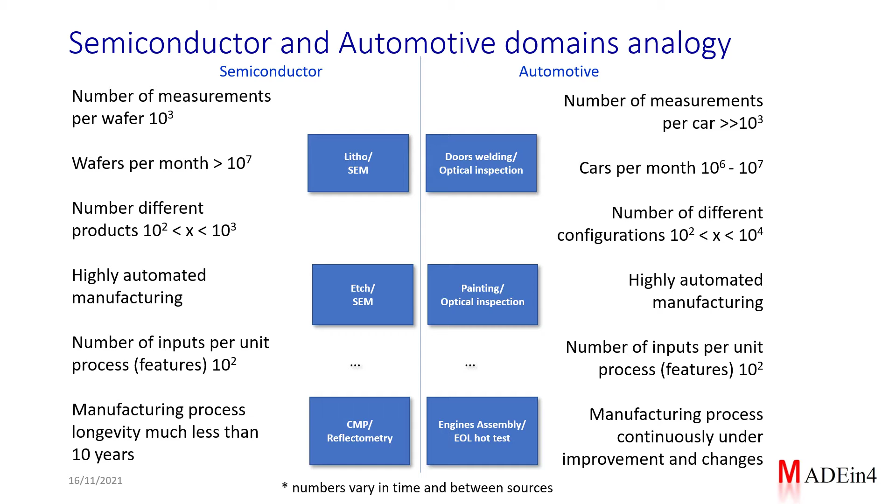The semiconductor manufacturing process typically is quite stable, changing in years typically, whereas the manufacturing process in automotive industry is continuously changing and improving. So these domains share similarities in design and manufacturing flows, although of course the content of these design and manufacturing modules differs. But because of this analogy, we can share innovation in machine learning-based methodologies, and that enables the transformation, as mentioned earlier, from the reactive to the predictive domain.

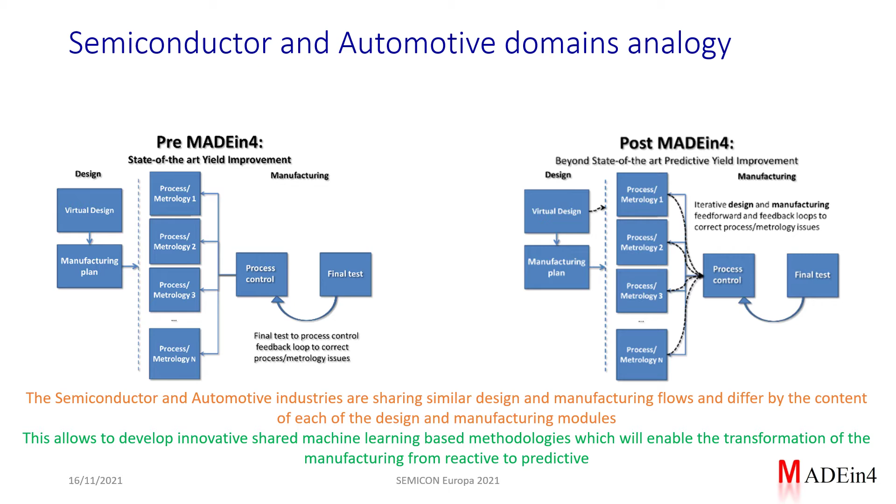Yeah, data is the new oil, is what people say. It's clear that there's more and more data being collected, pushed to the cloud. Sensors are added everywhere. You see that more and more data is also collected and stored for future usage. And there's also increasing use of all sorts of algorithms and machine learning to process all these data.

But data alone is not sufficient. You have to add context in order to make use of this data. So adding data analytics and artificial intelligence helps create information. That is data placed in a context, and that is what you need if you really want to make use of this data. Cyber physical systems play a role in this because the interaction of the physical world, the computing world, and also embedded intelligence is what really creates information and what turns data into meaningful data, being information.

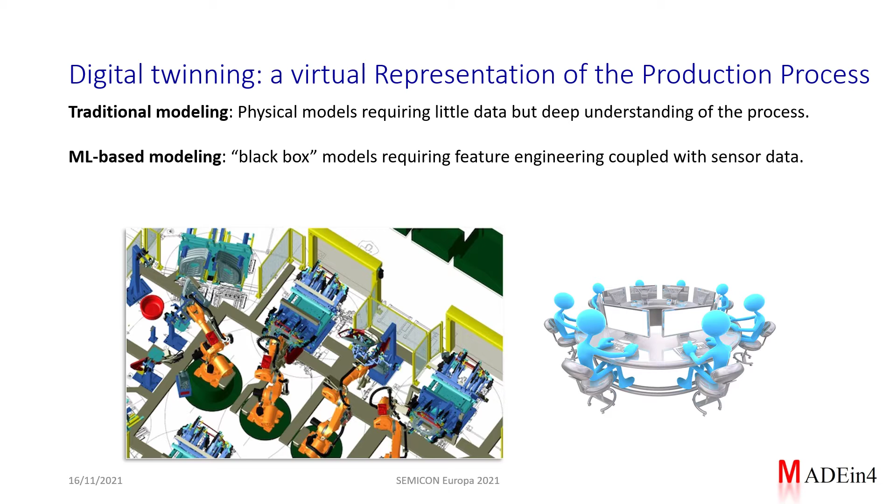This brings me to the project highlights, and the first highlight that I want to present to you is from IMEC. IMEC is an important partner in the project, and one of their tasks is to supply samples to the partners. In this case, they created samples of back-end of line devices, and with those devices, programmed overlay is possible, and partners can use these samples to test their metrology tools and compare the results to other data available.

Another very interesting result is produced by Excillum, and actually Simona from Excillum will be presenting this in more detail later this morning. Last year, Excillum produced a first prototype of a new X-ray source, which has a higher power and in this way enables a higher throughput for X-ray metrology tools.

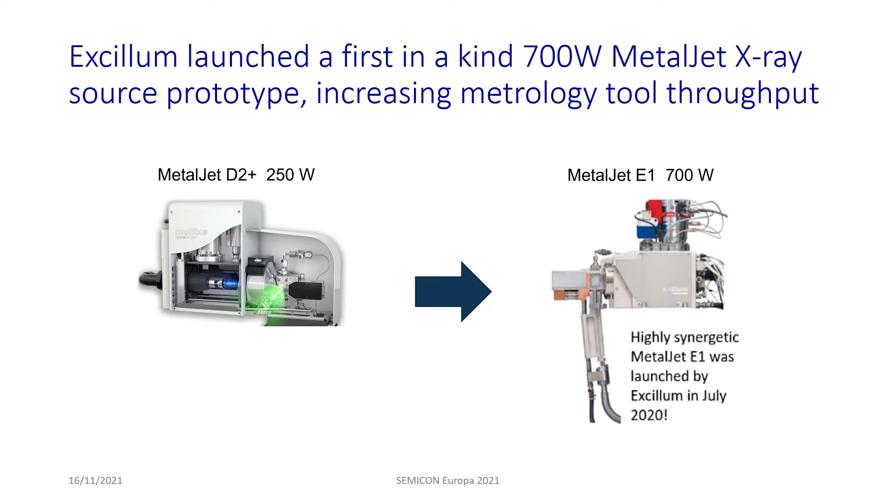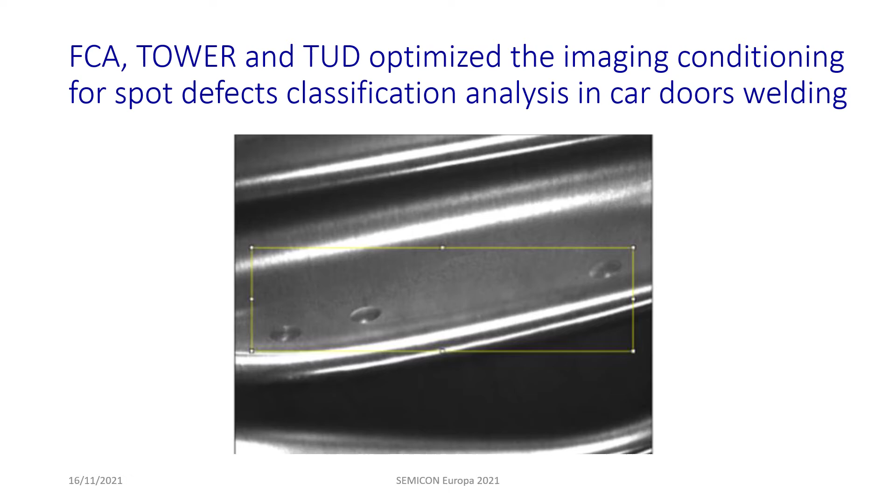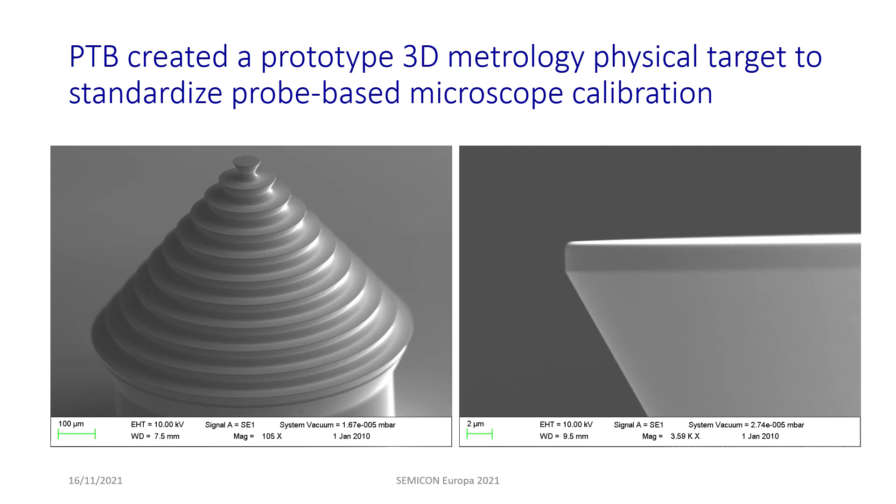Then finally I want to show you what other presentations from the MADEin4 project will be shown during SEMICON Europa. Later today, you'll be hearing presentations by Simona Laza from Excillum, as mentioned earlier, on the MetalJet, the technology for X-ray generation. Juliette van der Meer from Bruker will talk about other advances in X-ray metrology made by Bruker and MADEin4. And the last talk in this session will be by Thomas Ashby from IMEC, and he'll be talking about the privacy-preserving amalgamated machine learning algorithm, the PAML, and what's been achieved in the MADEin4 project on that topic.

Tomorrow there will be a presentation by Ovadia Ilgayev from NOVA in the SmartX session, and that will be on innovations in integrated metrology at 10 o'clock. And later this week, on Friday, there will be another session involving MADEin4 presentations starting at 10 o'clock, and that will be on artificial intelligence and robotics. There will be presentations there from Jean-Hervé Tortai, LTM, looking at error detection using ellipsometry and how to use that to do metrology.

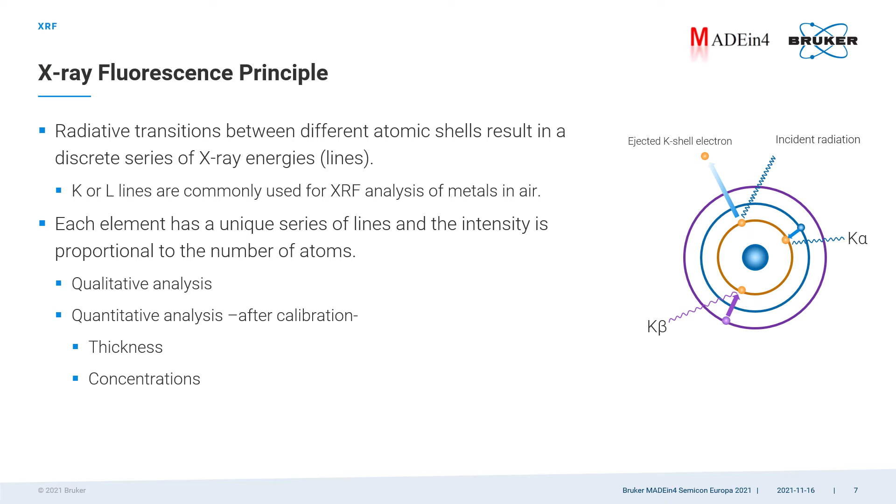We can measure these photons with an XRF detector. Each element has a unique series of fluorescence lines, which allows for qualitative analysis of the sample. The measured intensity is proportional to the number of atoms in the irradiated sample volume. So if we have a reference with a known quantity of the element, we can calibrate the system and perform quantitative analysis. We can measure the thickness of metal films and stacks, or measure the concentration in alloys. It's a beautiful technique because it is non-destructive and requires, which is especially the case for semiconductor wafers, no sample preparation.

Some technical details on the state-of-the-art XRF channels at Bruker. So on the source side, we have a choice between various anode materials. Which one is selected depends on the applications of the customer. The typical anode materials are molybdenum, copper, rhodium, and tungsten. Through capillary optics, we can create a small spot beam with typical widths in the range of 15 to 35

micrometer. The beam comes from 90 degrees above the sample, and therefore the setup has a low sensitivity for errors in sample height. The small spot allows for measurements basically till the wafer edge, so the edge exclusion is very small. On the detector side, we work with SDD, silicon drift detectors, for efficient photon collection that does not require cooling with liquid nitrogen. We can mount up to 4 detectors in the tool to increase the detected flux.

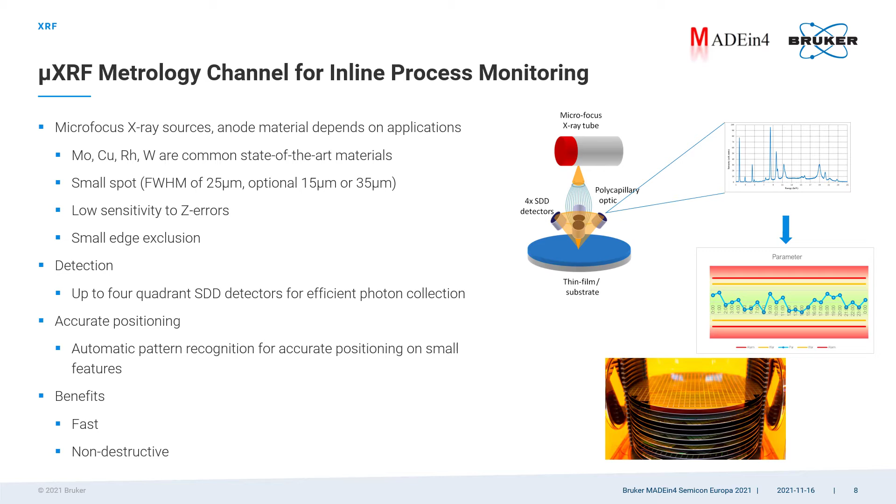This is one example of an XRF application used in memory. XRF is used to control the tungsten recess in 3D NAND structures. On the right-hand side, you see the typical 3D NAND stack with alternating oxide-tungsten pairs. Changes in tungsten recess only make up for about 1% in sample volume, therefore a high sensitivity is required. We could prove that our tool has a 3 sigma relative standard deviation of less than 0.15%. So we are sensitive to the changes in the DOE, but also to variations across the wafer.

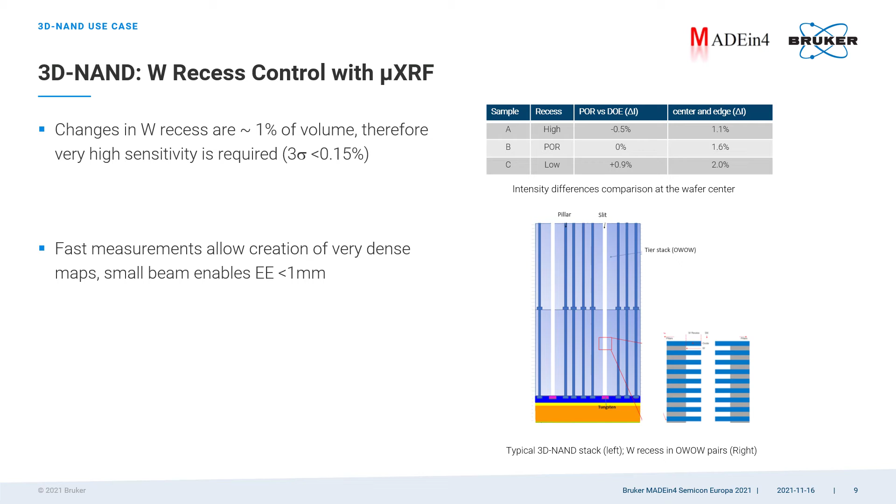Another example shown here. Electroless plating stacks are used in power chips, especially for automotive. These metal pads are a few hundreds of nanometers of palladium on a few thousands nanometers of nickel on thick copper. And sometimes this is then topped by a thin layer of gold. It's important to monitor the thickness of each film in the stack. With micro XRF you can do that in tens of seconds, in line and on product wafers.

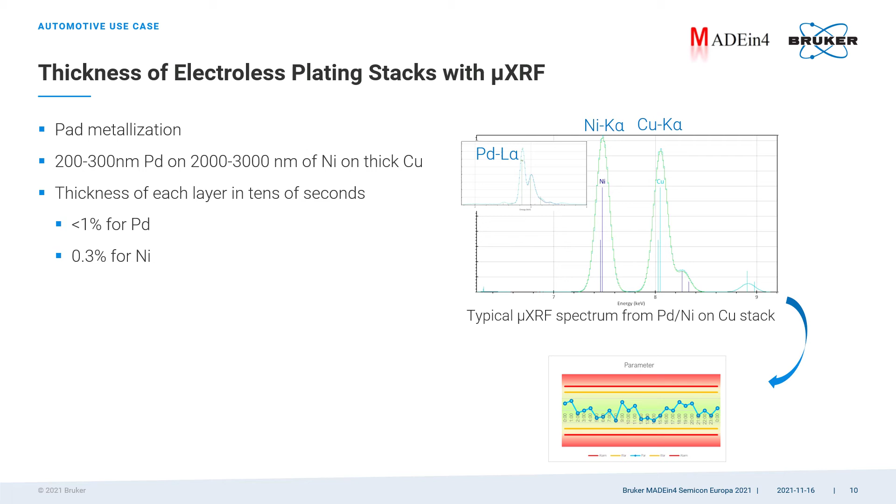The last example comes from wafer level packaging. As you may know, lead-free solder bumps are now commonly used. And these consist of an alloy of tin and a little bit of silver, typically a few percent. The silver content has an influence on the bump reflow temperature, and therefore it is important to monitor it routinely. Also, under-bump metal thickness must be monitored. So this can all be done with micro XRF. One of its key advantages is that it can measure single bumps.

Now, wafer level packaging has a pretty aggressive roadmap for the bump size and pitch. So that also imposes new requirements on our XRF channel in the near future to shrink the spot size so that it can keep up with the industry's requirements.

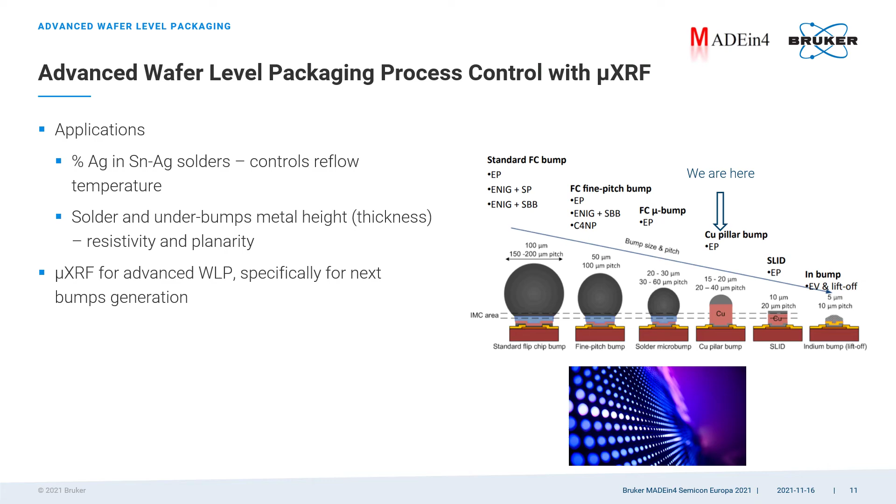In this couple of slides, I'll give you a brief introduction to the technique and application of TXRF, which is a technique to measure metal traces on the wafer surface. The principle of TXRF is very similar to XRF. We hit the sample with an X-ray beam and we measure the fluorescent photons with an SDD detector. Now there are two big differences. First, with TXRF we use a monochromatic beam. In micro XRF it is a polychromatic excitation.

Shown here. The second big difference between the two is the incident angle of the X-ray beam with respect to the sample surface. In micro XRF we hit the sample at a high angle, like 90 degrees, and in TXRF we hit the sample surface at an angle that is below the critical angle of the substrate material. So therefore the X-rays do not penetrate into the substrate but are reflected on the surface. This then creates the so-called X-ray standing wave field, which is the constructive interaction between the incident monochromatic beam and a totally reflected beam.

And this setup is then used to measure traces of metals on the wafer surface. So you can say that by the standing wave, the contaminant is excited twice, once by the incident and once by the reflected beam, and therefore amplifying the fluorescent signal.

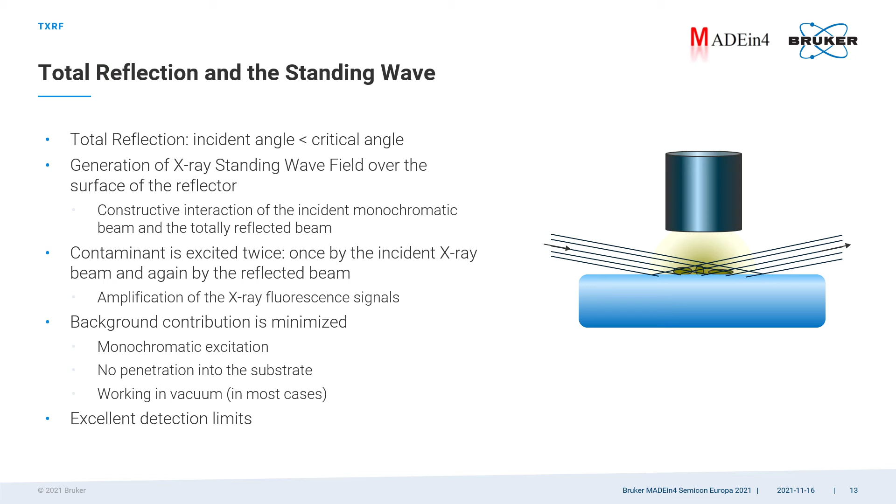The driver for chip manufacturers to monitor metal traces is yield optimization. It is needless to say that optimized yield saves costs and gives a competitive advantage. There was an example of a manufacturer who saved millions in only half a year by improving yields through better monitoring.

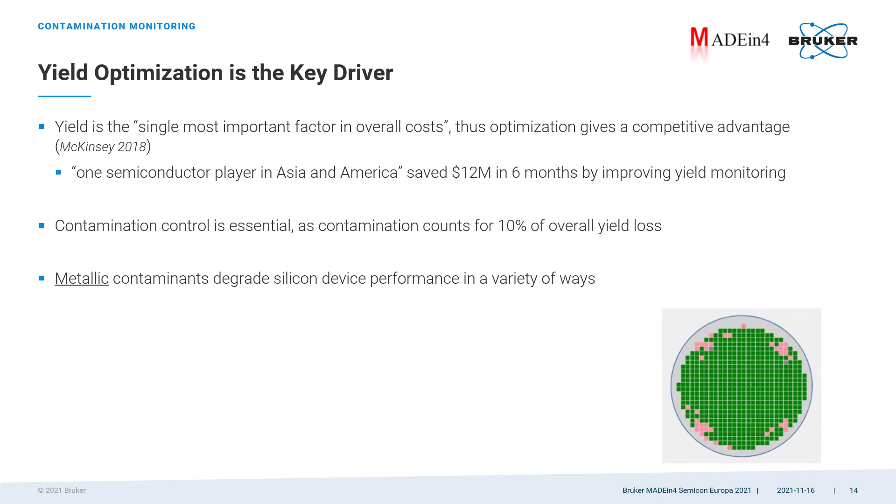Contamination control is one aspect of yield control, and within this field, metal contamination control is vital. This is because metals of all sorts, from sodium to lead, can degrade the device performance in many ways. And metals can be introduced at every process step, through the equipment, the materials used, or by humans who work in the fab.

Now I'm going to show you the progress we've made in micro-XRF and TXRF in the MADEin4 project. So in subtask 3.1.2, we work together with Excillum to push the micro-XRF performance. We are running tests on a prototype of the latest generation liquid MetalJet source. The source has a gallium liquid anode. You can see a picture on the right hand side.

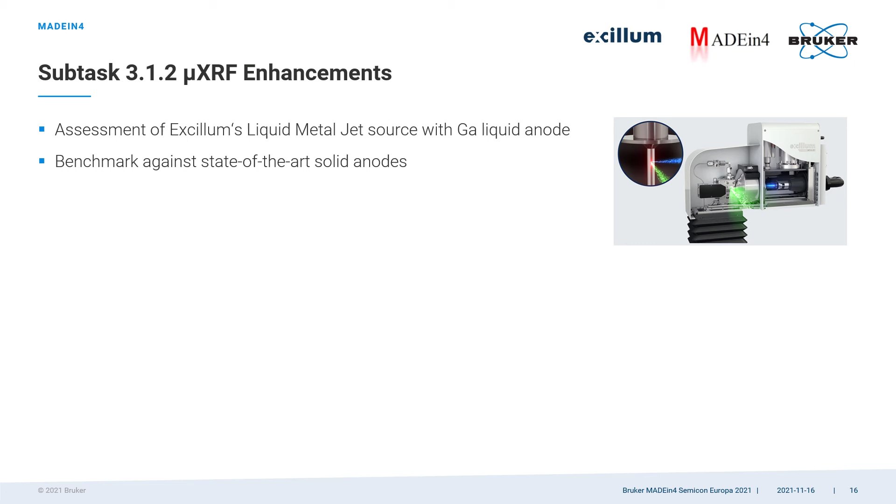Excillum has set up a test bench with the source. Bruker provided the X-ray optic and a state-of-the-art silicon drift detector. So we used this setup to run benchmark tests against the known state-of-the-art solid-state microfocus tubes.

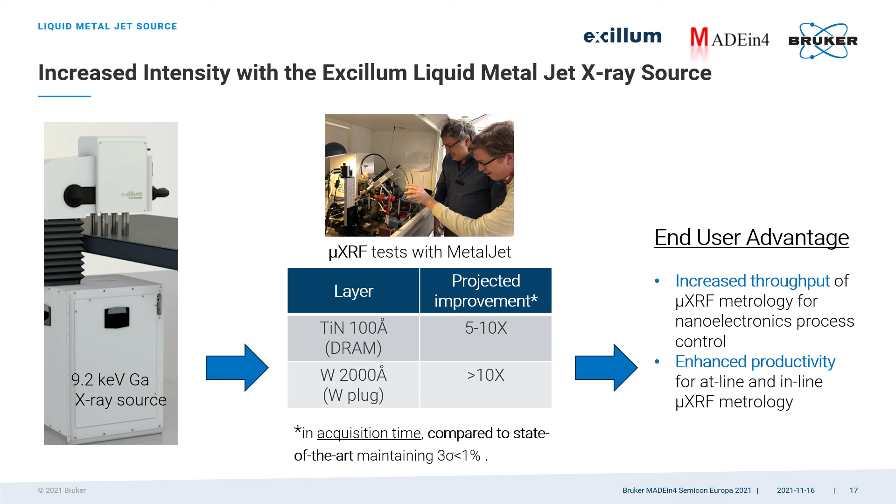Two sample types were measured that are relevant to semiconductor processes, namely thin titanium nitride and thick tungsten. First results showed a 5 to 10 times improvement in detected flux compared to the common solid anode microfocus tubes. Such boosted flux will increase the throughput of the micro-XRF measurements in the process and is eventually beneficial to the end customer who experiences an enhanced productivity.

This table summarizes our initial findings. The liquid MetalJet source shows a great improvement in fluorescence intensity compared to the common solid-state microfocus tubes on the same samples. Also, the spot size fits the requirements. The concept of the liquid anode is that the power load can be much higher compared to a solid-state anode. And this is beneficial because flux scales with the source power.

Our tests have shown that the X-ray optic may need some modification for best results, because these optics are optimized for the common microfocus tubes. The beam path for the MetalJet is horizontal, whereas the common solid-state microfocus tubes have the full degrees of freedom to mount the source.

For the next subtask, we work on improvement in the TXRF tool. We said in our proposal that we wanted to improve the sensitivity for light elements: sodium, magnesium, aluminum. In the MADEin4 project, we have adapted the light element excitation and detection. We also wanted to improve the throughput for full wafer mapping. To reach this goal, we implemented a laser-based align meter to speed up the time to align the wafer to the correct height and angle.

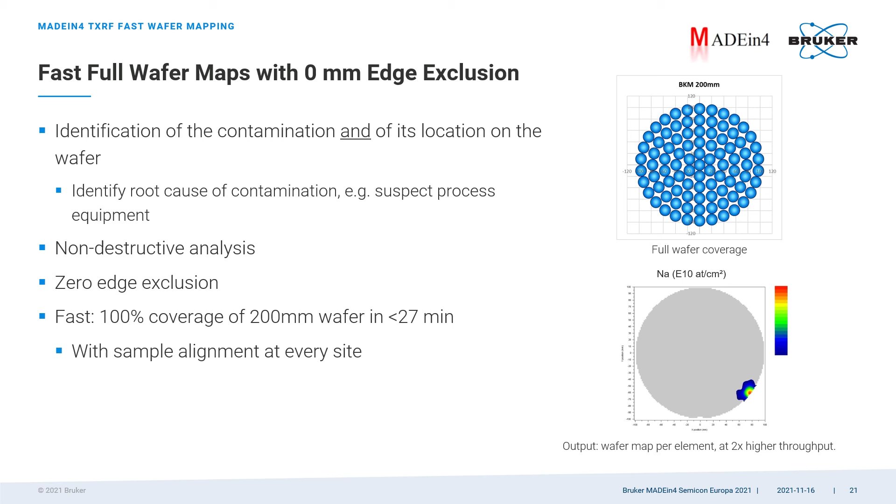This brings me to the end of my talk, where I'd like to look ahead on what's coming after MADEin4. Regarding micro-XRF, this technique is already present in HVM. However, the requirements on spot size and precision are only getting tighter in the years to come, so we must continue to push the performance of our micro-XRF tools. In addition, a more powerful micro-XRF tool would also open the door for more applications, especially in advanced logic and memory.

So Bruker will continue the collaboration with Excillum for smaller and brighter X-ray sources to reach that goal. The metal contamination project will shift focus towards the localized detection of hazardous elements and metals on product wafers.